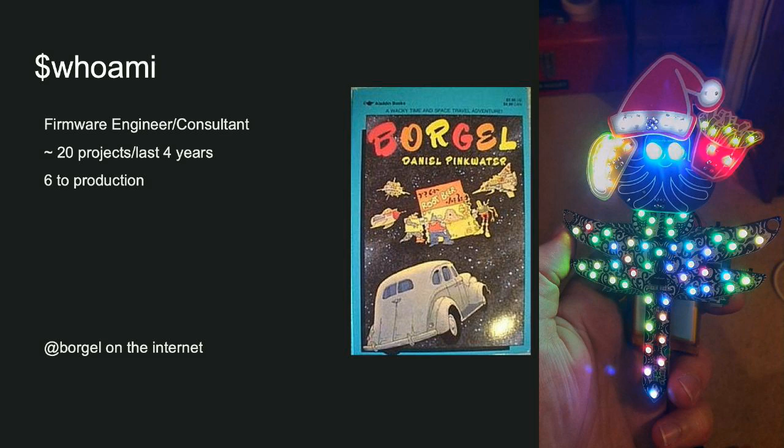Okay, cool, so who am I? If you run the command, I'm Borgel. I'm a firmware engineer, a consultant. In the last 4 years I've worked on about 20 projects, 6 of them went to production. Some of those companies are even still alive. On the internet, I go by Borgel.

You may know me from the one hit, I make DEF CON badges. This is last year's. My level of experience is somewhere between my friend's constantly terrified baby and 2 Gandalfs stacked on top of each other. I'm slightly to the left of the center, so read that as you may.

Okay, so some guardrails. This information is relevant based on my experience. I would suspect it's only relevant for small to medium volume manufacturing. If you work for Apple, it's not going to look like this. Dealing with small manufacturers is not the same as dealing with big manufacturers. This is sort of, in my experience, for hundreds, thousands, tens of thousands type quantities, not millions.

If you're here expecting to learn from this and then go put the Galaxy S10 into production, you're fucked. So hopefully this is fine. I guess, yeah, that was the Note 7. Smaller batteries, less close to the sun.

Okay, so did I lose my mic? Boop, boop, boop, boop, boop.

Okay, cool, so what does a factory do? If we start at the beginning, a factory builds your product. Yeah, you'll be in this soon. Let me ask your permission. Okay, great, he nodded. Okay, so a factory builds your product, that's cool.

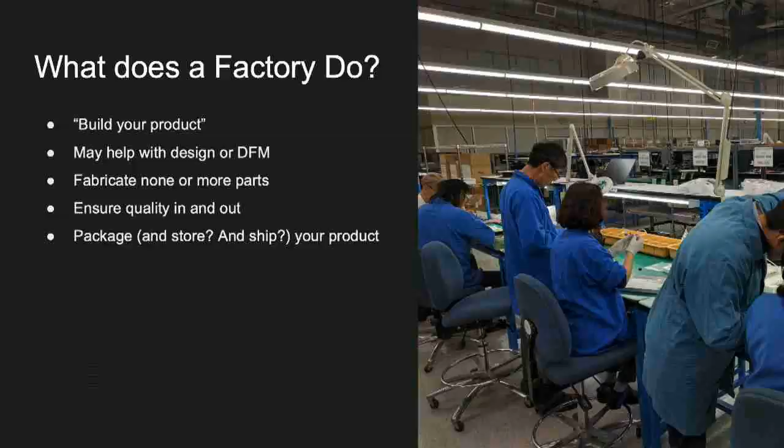Oh, it's animated. The guys that did Cards Against Humanity put together a product fulfillment company called Black Box. This is from the top of their homepage, and it's friggin' awesome. So that's what a factory builds a product looks like. Okay, so factories build your product, that's cool.

They do some other things depending on the level of complexity and the money you're spending. Maybe they help you get things ready for manufacturing. Maybe they help you build some of the parts. Maybe they build all the parts. Maybe they build none of the parts, they just stick them together. They can do some stuff to ensure quality of the things coming in and out. Maybe they package your widget, maybe they package your widget and put it on a pallet and ship it. Maybe they don't. A factory is fundamentally a machine, made of meaty humans.

Here are some humans. It's designed basically to do one process. You're the one who defines the process, but it's designed to run that process, and only that process. When everything works well, the factory will do exactly what you told them to do and exactly nothing else. Taking initiative is helpful in some places, but this is one of the places where you don't want people to do things besides exactly what you want. So that raises an interesting problem.

Someone is going to do a quality check on your product, and hopefully it's not your customer. If it's not going to be your customer, that means it has to be you. Remember, the factory will do exactly what you tell them to do, and hopefully exactly nothing else. So unless you specify—for instance, when you pick up the piece of plastic, if it's melted and brown instead of white, don't try to build a product with it. Even if you, an engineer, can look at the widget and go, wow, this is obviously broken, unless you give them some standard to use to decide whether or not it's broken, define a test of some sort, they're gonna try to use it.

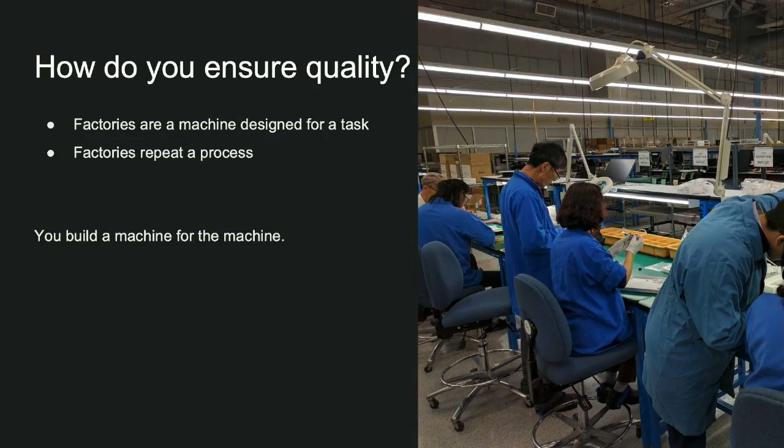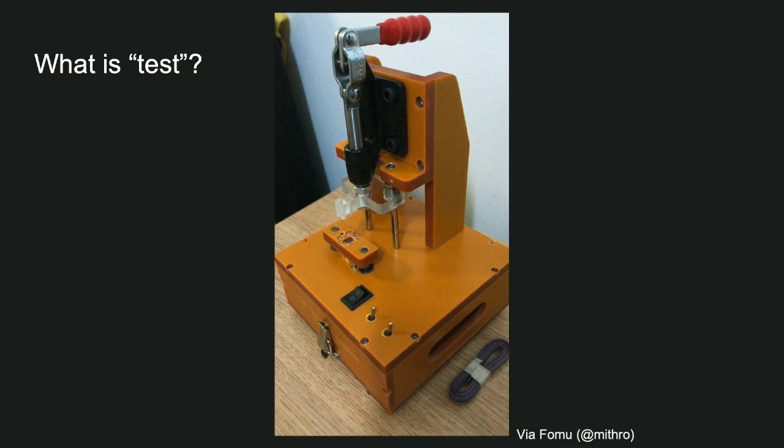So what is test? A factory is a machine that runs a process, the same process. So the way you test is usually by building a tool, a little machine for the bigger machine to operate. Often that looks like this. They can look like lots of other things, literally anything. The factory will do whatever you want, as long as you ask, get a quote, and they'll give you a price. Probably your test stuff will look like this and not like ponies or whatever, unless you're testing a horse bridle.

Okay, so let's talk about test fixtures. These are both test fixtures. Mike Choi is intimately familiar with these. They look somewhat different. The actual thing that's a test fixture here is there's a micro USB cable sitting on this table, attached to a computer. That's the whole test fixture. This other fixture is attached to a computer off screen, a barcode scanner, and a bunch of other stuff. It's this box in terrible medical beige with this big thing on top that clamps and makes satisfying noises and has buttons and all sorts of stuff. But these are both test fixtures. They're tools designed for a purpose, so they look very different because they serve different purposes. They sit in different places in the manufacturing line.

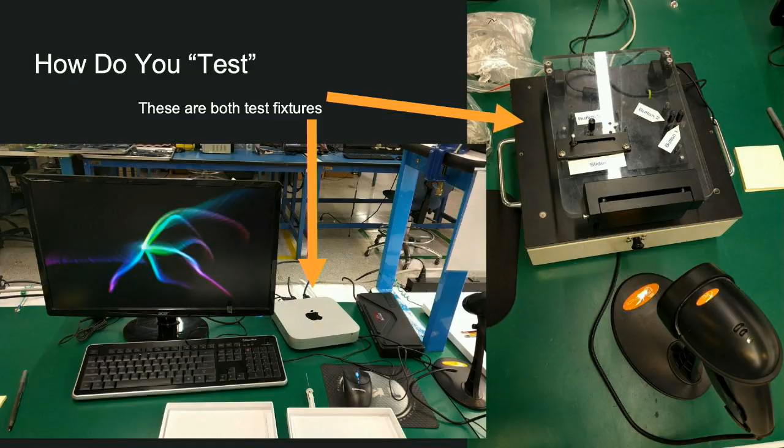So this is Mike again. The goals of a test fixture: ensure that whatever thing you're testing meets the standard, and facilitate testing for that standard. Sometimes the thing inside is called a device under test, DUT, or a unit under test, UUT, or whatever. They have a bunch of names.

So there are some other traits you want your test fixtures to have. You want them to be absolutely reliable, and when they fail, you want to know that they failed, and you want them to fail very loudly. Because if your fixture isn't reliable, the quality of the goods you're producing is only as good as the quality of the fixture producing them. So if your fixture fails and you don't know it failed, someone's going to know. Hopefully it will be you later down the line, and then you'll just have wasted money. Hopefully it will not be your customer receiving a failed object, because you're going to spend a lot more money and a lot more goodwill if you catch it there. So you want your test fixtures to be reliable, or loud when they fail.

You want them to be low cost. There's a bunch of different versions of low cost, and we'll dive into this more soon. Most things at the factory, cost sort of looks like time. You want your factory to produce 5 units a week, say. That will take some number of humans, which costs money, and some amount of floor space, which costs money, and it'll require management support and things like that. So if your line runs fast, maybe you only need 1 line. If your line runs slow, maybe you need 5 lines, each producing 1 thing a week to get your 5 things a week. So low cost ideally means fast, or as fast as you can responsibly make it.

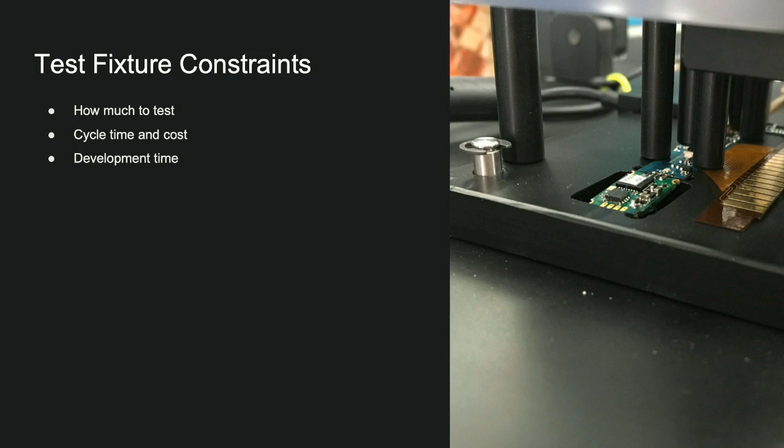There's a constant tug between how much to test. In an ideal world, you would test literally every component of literally everything, because that's how you would ensure perfect quality - by testing every aspect of every part of your product. And that would totally work. But that's going to be long and slow, and take a really long time for you to develop, so those are bad things. There's a tug between how much it should test to be likely to catch things that are going to fail, versus how much you let go and hope won't be a problem.

And then there's development time. I'll hammer this home later, but a test fixture is a product. You didn't think you were building another product when you decided to build widget deluxe, but a test fixture is a product. So it deserves as much respect or fear in that regard as your primary widget does, and the less you predict that, the worse it will be. So there's a balance between how much time you spend developing your test fixture versus your product, because for one person, it's probably one or the other.

Test fixtures have a bunch of different outputs. I still don't know what ERP is.

Enterprise resource planning - that man knows what ERP is. That's also the man who's using Cadence. Yeah. I wouldn't have made that distinction, but I appreciate that you did.

So test fixtures have a whole bunch of different outputs. Maybe the most important is also the most obvious, which is which units passed and which failed. Literally the point of the test fixture is to tell you that. There are lots of different ways it can do that - it needs to tell the operator, which probably looks like a light or a screen with words on it. Red and green lights for pass fail, awesome, unless your operators are colorblind - then it's not awesome. So consider using words also, because they can probably read even if they can't discriminate between red and green reliably.

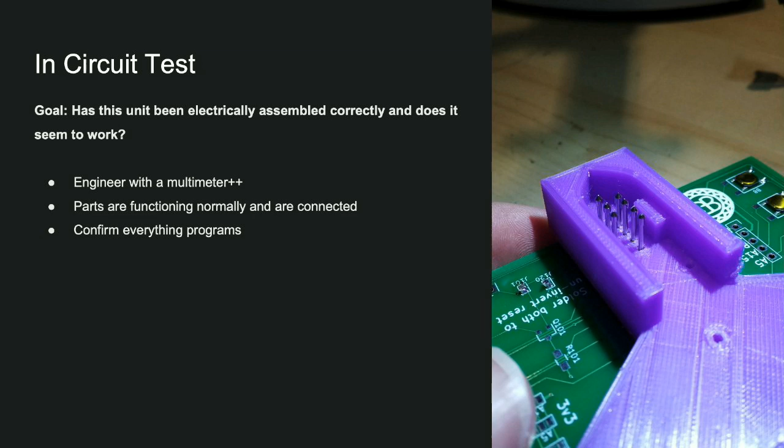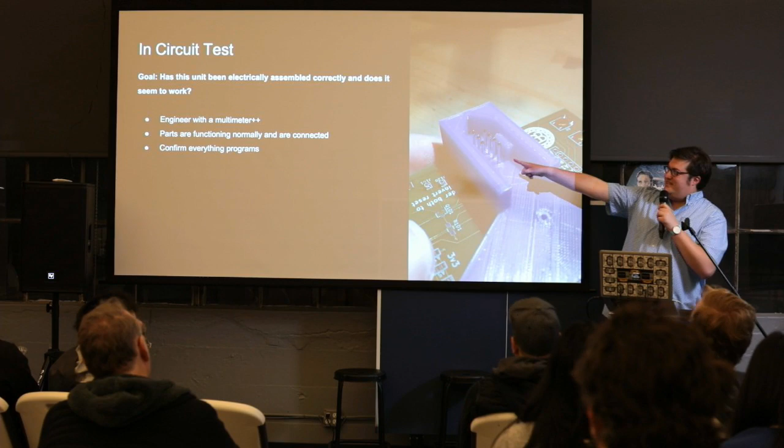So you want to test things like that. You want to be able to test that, like in the case where you have an analog line that runs through a voltage divider - you want to make sure those resistors are correct. You want to make sure your capacitors are capacitors and not resistors, because they might fit in the same place, but your board may not behave in the same way. Or worse, it will behave correctly and it'll just draw 10 times as much power for a reason you will never know. So in some sense, it's literally an engineer with a multimeter plus plus.

If it is a microcontroller, you want to confirm that it programs. These fixtures can look like all sorts of things. This is the fixture which never worked, which I will pretend worked, which I built for the DEF CON badges I built last year. This was built to test about 500 pieces.

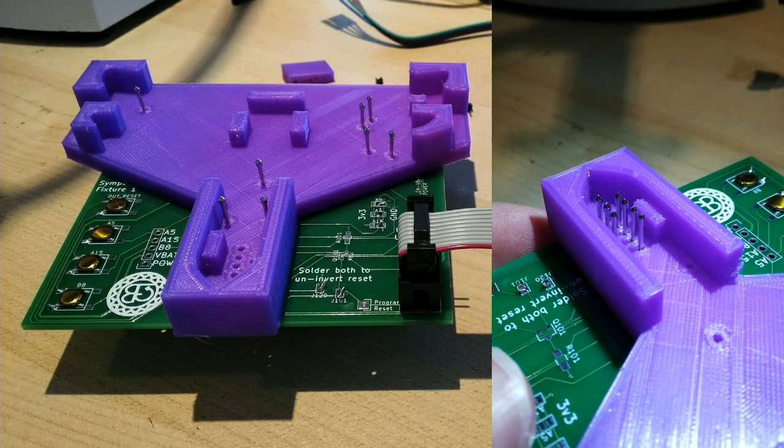Definitely not worth contracting the great guy we use to build the big medical-looking fixtures, because that's a lot of money and I wasn't going to test that many, and it was going to be me, the engineer, operating them, so I didn't care about the quality of the user feedback. So there's this board that I made - boards from China, so cheap, sorry, I love OSH Park.

So there's this board which plugs into an ST-Link, and it has a serial header which is hidden over here, and it hits a bunch of test points. There's another view of those in a second, and it hits the programming header and the serial header and everything. Sort of a one-stop shop.

Once everything is plugged in, it powers the board, so you don't need to put batteries in, you don't need to play with power switches - it forcibly powers the board. This one breaks some of the test points out so you can hit them, and it actually has - this version didn't have LEDs, one of the versions had LEDs and buttons so you can run tests - and it has the spring pogo pins.

So pogo pins are cool. I'm guessing people are broadly familiar - if you aren't, they're, in my experience, always gold. Little spears, most of them look sort of like little spears. They're kind of hard to see. They're spring-loaded, so you put your circuit board on top and press down a little bit and they make contact, and internally they have a spring, so you solder or wire wrap or socket onto the bottom, and then they make contact with your board.

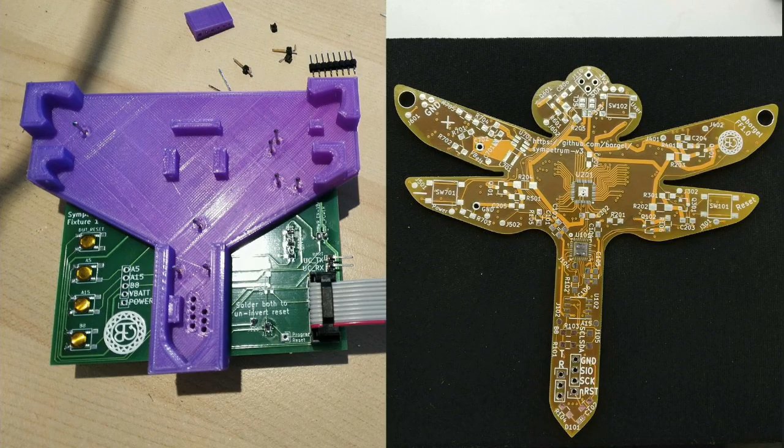So I guess this is the mating pair. So that's the board again, and you can see on this side there are a bunch of these test points which hit different lines and things. The rule I followed in this case was break out basically everything I could conceivably need, and then I can choose later whether or not I needed to actually hit it with a pogo pin and test it.

You can kind of see, it's hard to tell, but this flips over and mates. It's also worth noting on the bottom here, those pogos, the head size is such that they can hit these through-hole headers. So I never had to solder the headers in, I just plugged them in.

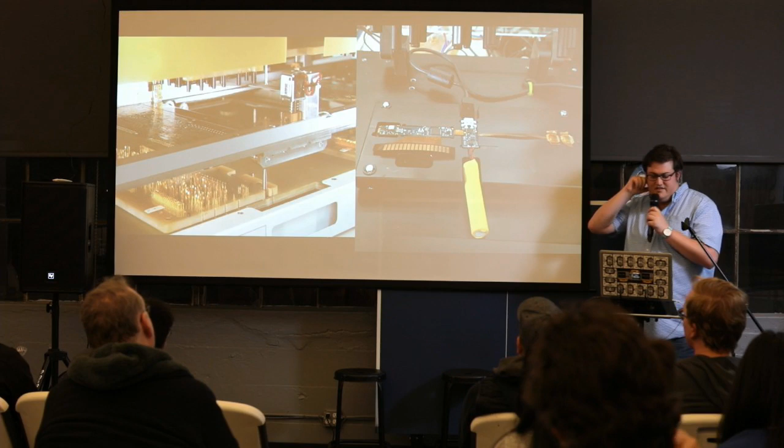So that's pretty obvious. This is the somewhat more advanced version. This is the inside of that flippy closey thing, and this is the rigid flex thing that goes in it. This is kind of what it would look like underneath. Again, it has a bunch of pogo pins. You put the thing in, you close it.

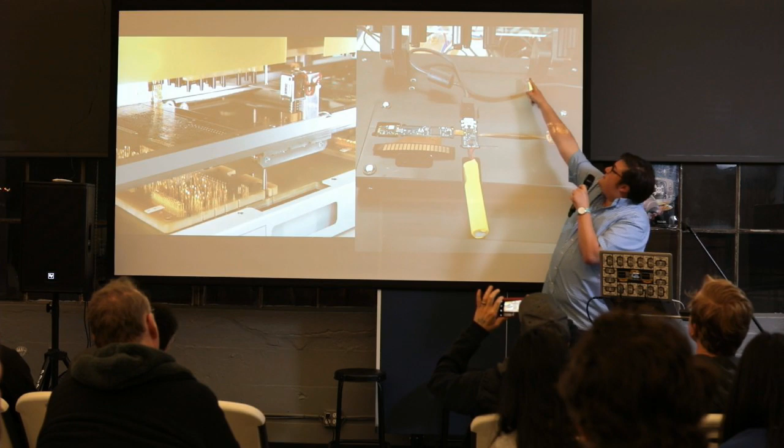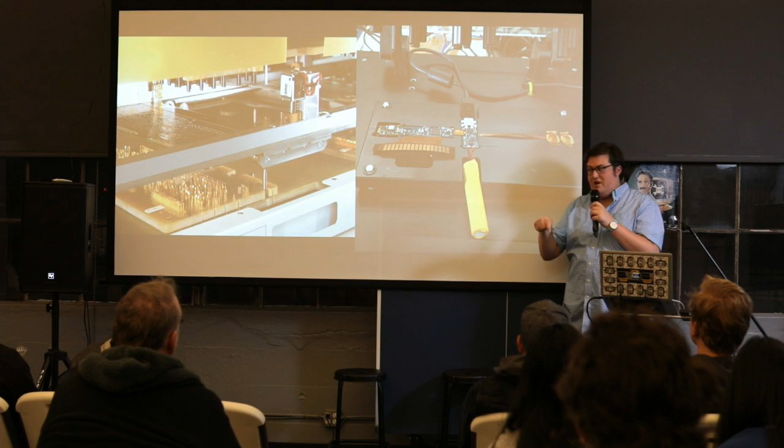The other interesting thing about this fixture, hard to see, there are some pegs and stuff sticking out up there. This has 2 buttons and a button and a big capacitive slider, so there are buttons that reach through the top lid. The operator, when prompted, it'll say press button 1, there's a label that says button 1, and the operator presses it, and the peg is spring loaded and hits a button, so they can facilitate the operator testing it.

Okay cool, so we kind of talked through it, test points on everything you could possibly need, and then pogo pins. You can see on this the guy who builds these for us wire wraps them. He's awesome. He milled the top deck with a bunch of these holes to press fit pogos in, and then wire wrap the pogos to all the different devices.

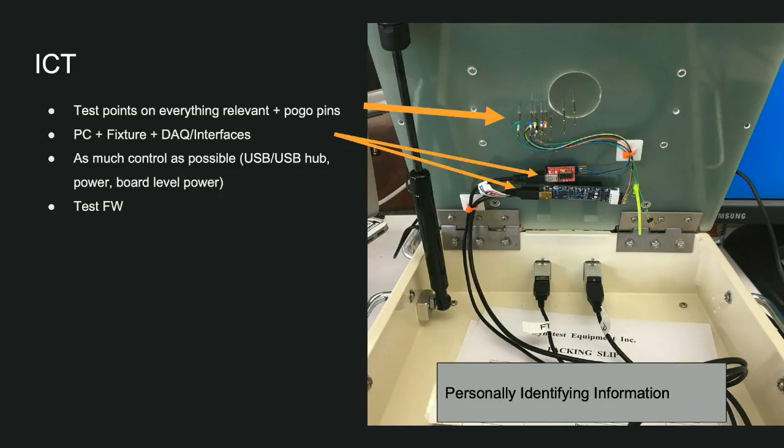Typically, a fixture like this has a few pretty normal looking constituent parts. There's a PC, there's the fixture, and the fixture may include a bunch of stuff, like in this case an FTDI to hit serial lines, a programmer. This is broken out of its shell, but it's a normal SWD programmer wired into the pogo pins. Often, if you need to test analog lines and stuff, maybe you have a data acquisition box. I've used LabJacks a bunch, whatever, it doesn't matter, you can use an Arduino, it's all fine.

But something that can basically read and write analog and digital voltages. It's convenient if everything is all in the box. It's more convenient if it's all in the box and all the USB hubs and everything are in the box, and the only thing exposed on the back is one USB connector. In this case, you can see there are 2, and we had to label them because it was never obvious what to plug in where.

You want as much control as you can possibly get, because at a certain point, things become not as reliable as you expect. This is kind of where you can get really far using hobbyist grade stuff, and sometimes, not always, but sometimes you'll discover this device stops enumerating over USB after testing 50,000 units because it was never designed for 50,000 cycles, because ST, when they made my ST-Link, that wasn't part of the hobbyist design criteria.

So there are places where you may discover you want to spend for things like that. One of the ways to work around it is by having as much control as you can. For instance, you want to be able to pull power to the board completely, because sometimes things will end up in weird states. You want to reset everything before you run a test cycle, and totally pull power from everything. Having control over that is really good.

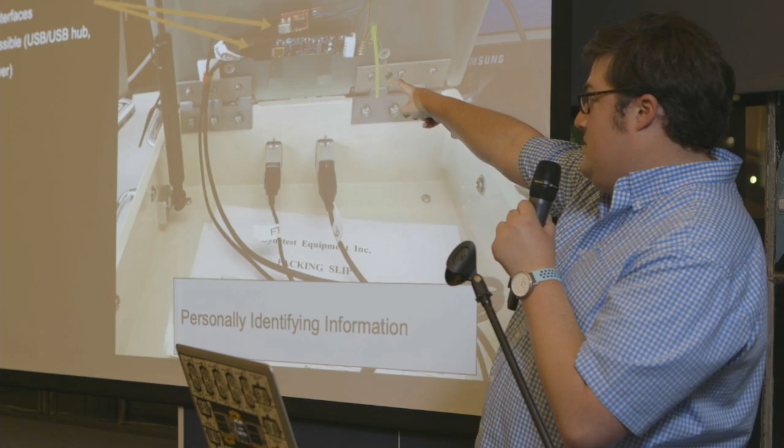The way we used it was we hooked the programmer and the FTDI and stuff up to some of these ports, even through hubs up through some of these ports. Before starting a test cycle, we would disconnect the USB devices from the computer and then plug them back in and let them re-enumerate, because being able to do things like that lets you totally reset if your fixture gets hosed, if you get caught in that outermost catch-generic-exception block and something has gone terribly wrong - you want the fixture to be able to totally reset itself. You don't want the line to go down. You don't want operators to randomly plug and unplug things from your fixture, because that's what they will absolutely do to try to get it to work again, which is reasonable from their perspective, but probably not what you want.

ICT - usually is maybe not fair - often ICT is facilitated by a sort of test firmware. It's your device, you can do whatever you want with it. There's no reason you can't flash customer firmware whenever you want, which means you can flash non-customer firmware earlier. So test firmware is super helpful.

I should have put a photo here to make this a more interesting slide. It facilitates running tests on the device. So if you want to test the SPI peripheral on your device, you can hit it with a SPI interface from the outside and then run test firmware on the device. You send it a serial command that says run test 1, then send a SPI transfer, and wait for it to come back and say yeah, I got the data. You can do things like that - that's cool. Doesn't need to be user shipping, but you can make it user shipping, you can do whatever you want. I mean if you can still OTA it, then who cares if it's user shipping?

Sometimes test firmware includes information that you don't want to expose to a customer, though. It may access one-time programmable flash or things like that, or serialization things that is code you don't ever want accessible from the main firmware image. So you may or may not want to ship it to a customer.

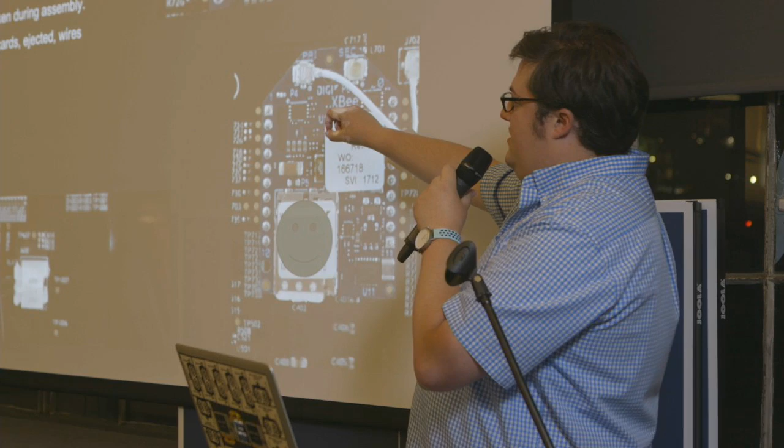So we're using this little cell radio daughter card, which is pretty cool and it works really well. It's a daughter card, it plugs into headers, so you can actually pull it out. But the one thing it doesn't do is run the RF lines to the antenna - the antenna is actually just past the top of this frame.

So the way we work around that is by including this really adorable, tiny little RF coax pigtail. It works totally fine, but it's really easy to crush the U.FL, micro U.FL, whatever it's called, connector. It's really easy to place it and have it canted so it doesn't actually make a connection. Then you take this whole thing and put it in the enclosure and tighten it.

And this is on the underside of the board, so even when you open the enclosure you can't see it. It's really easy when you close it to catch on that one last time and pull it off, and you don't know if that happened until the device gets into the field. In the case of this device, if it had gotten into the field with that detached, that would mean the customer was basically wasting money, because the device would disappear if the cell radio never got sufficient signal strength to actually connect. So we test that.

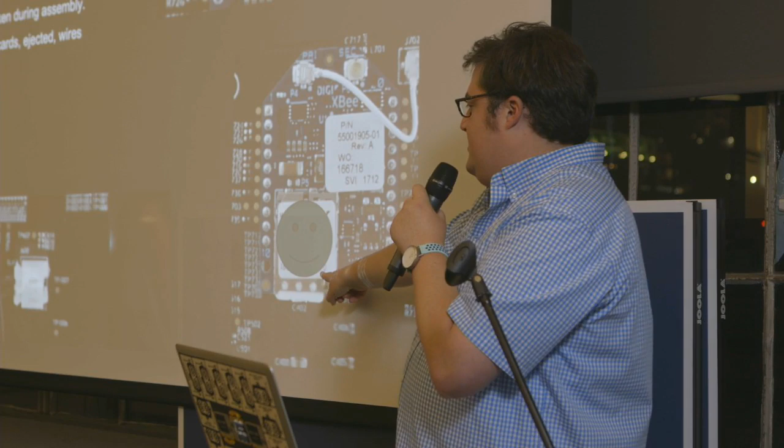It has a SIM card on it. The SIM card is in a push-push slot, which means you push the SIM card in and it locks; you push it in again and it spring ejects. Great for a human, but again we're taking this whole thing and putting it in an enclosure and it's on the bottom. If you bump the SIM card as it's going into the enclosure and it ejects, you can't see that, and you can't even hear it rattle because it's partially constrained. So the only way to check that is a functional test which tries to read stuff from the SIM card - if it's ejected, you would know because it wouldn't work.

It also has a wire harness that comes out the bottom, which is really tight. And if you pull on it wrong, the wire harness can come off or destroy the connector.

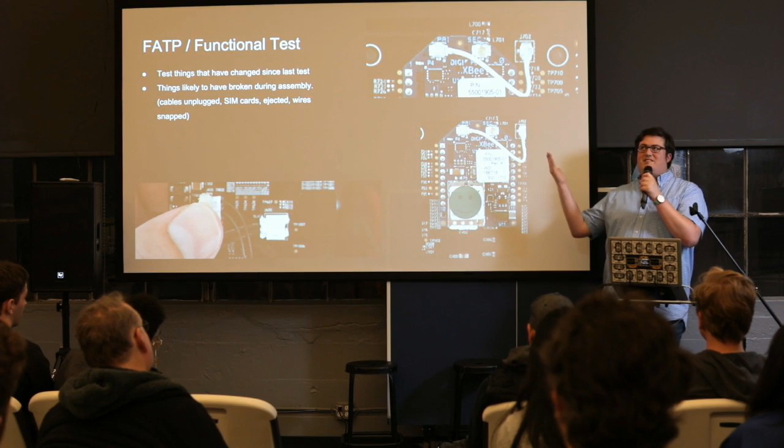So we actuate, we do things that check to make sure that the signals running through the harness work correctly. I already told you this, I guess.

Okay, so now just a bunch of random fixture tips. Everything ends up being a balance between the cost of the fixture, the development time, the cycle time, the reliability, and all that. So there's a spectrum here. The engineer in me, and I'd guess the engineer in some of you, is like, oh, we want to test the thing, we can test it automatically.

You can test the whole thing automatically. You want to, I don't know, what's out here? We want to test that the jump bike works? Great, so we put the jump bike, we put a fake human robot on the jump bike, we put the jump bike in a chamber with a fake treadmill road, we turn the road on, and we have the human pump the, yeah, you can do that. You can do that for anything.

You can automatically test every part of every product, but there's a spectrum of complexity where it doesn't make sense anymore. Remember, no matter what, you're going to have a human, unless you have some incredible line I've never even heard of with KUKA multi-axis robotic arms taking things out. You have a human who's putting it in and out of the fixture. It's fine to rely on the human to do things. They are reliable as long as they're well constrained. That's their job, to be able to do things.